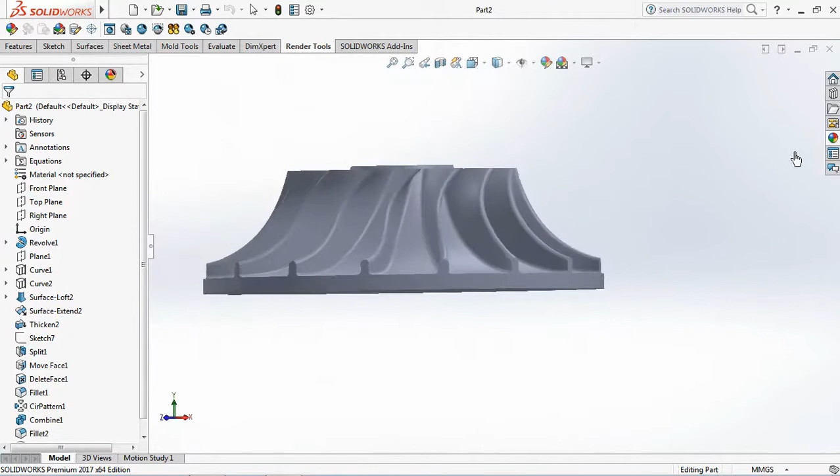Click front plane, then choose revolve boss. Create a profile sketch consisting of center line, line, an arc.

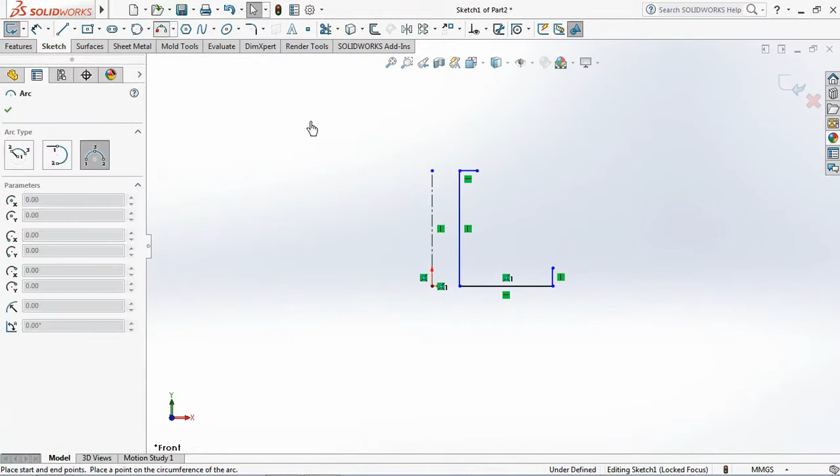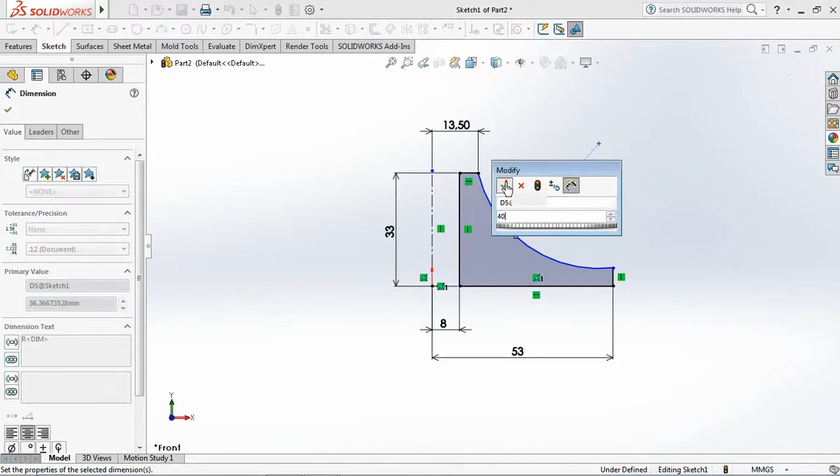Set each dimensions at 8 millimeters, 53 millimeters, 13.5 millimeters, 33 millimeters, radius 40 millimeters, 4 millimeters.

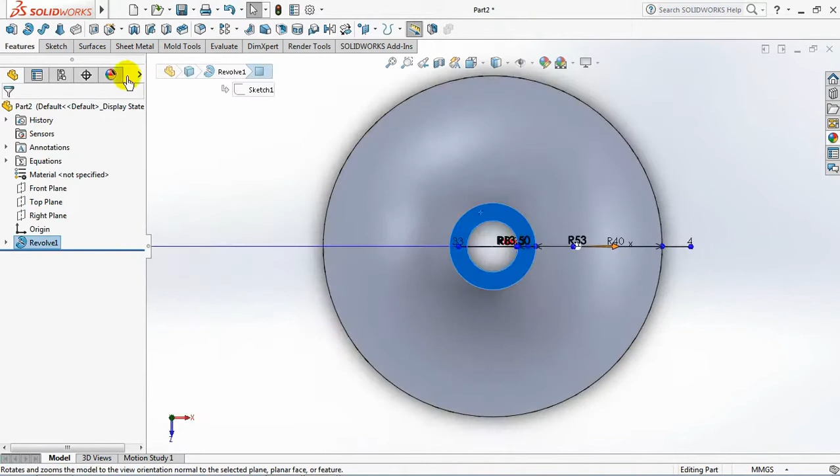Then set chamfer at 3 millimeters equal distance. Exit sketch, then click OK. Click top surface of impeller, then choose sketch on the sketch toolbar. Draw a horizontal line.

Then make a downward sloping center line. Set horizontal line at 30.5 millimeters. 20-degree angle. Exit sketch.

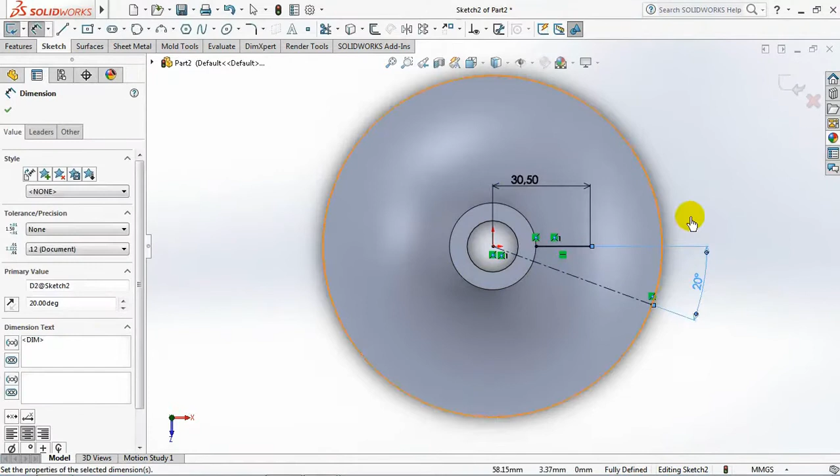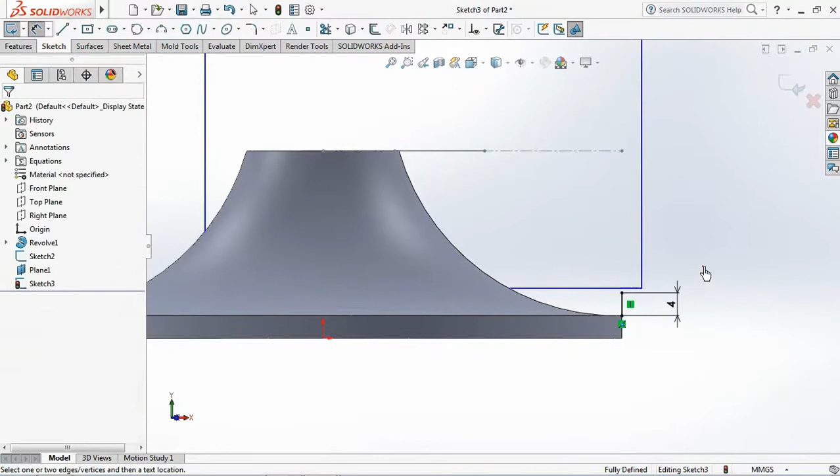Create a new plane. Click the top surface as the first reference, then click the center line as the second reference. OK. Then choose sketch on the new plane. Draw a vertical line. Set the dimensions at 4 millimeters. Exit sketch.

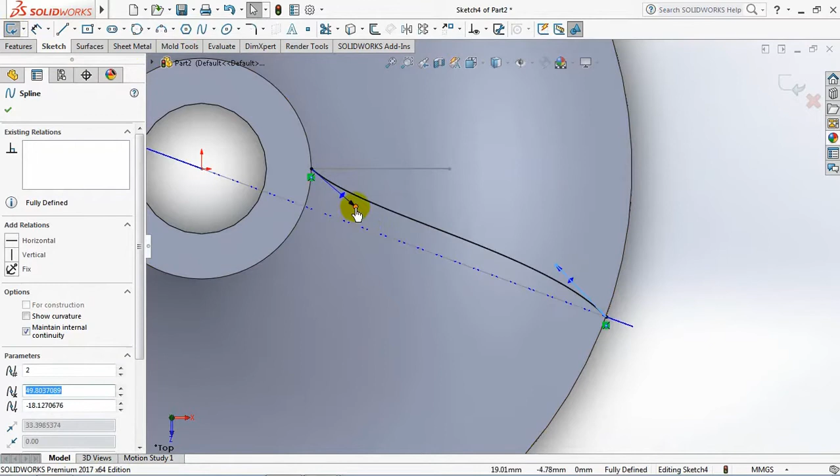Click the top plane, then choose sketch on the sketch toolbar. Create a spline sketch. Click spline, then drag the spline arrow. Arrange as shown on the screen. Exit sketch.

Click the sketch, then choose project curve on the surface toolbar. Choose sketch on face, then click projection face. OK.

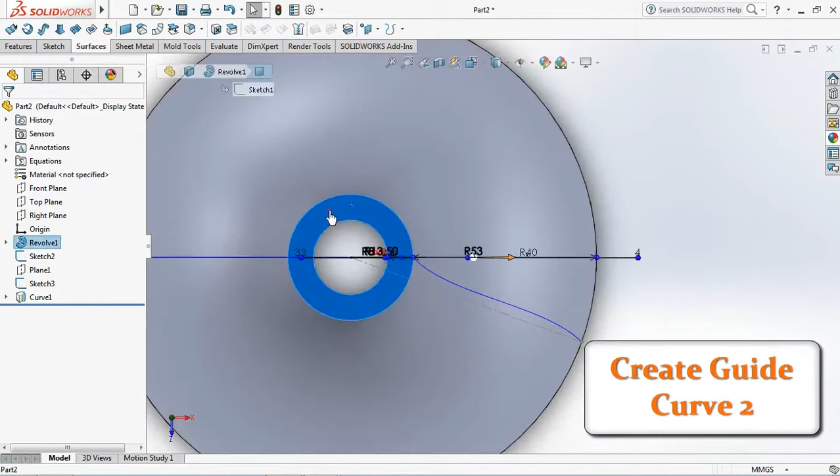Click top surface of the impeller, then choose sketch on the sketch toolbar. Create a spline sketch. Click curve 1, then select convert entities. Choose trim entities, then click trim to closest.

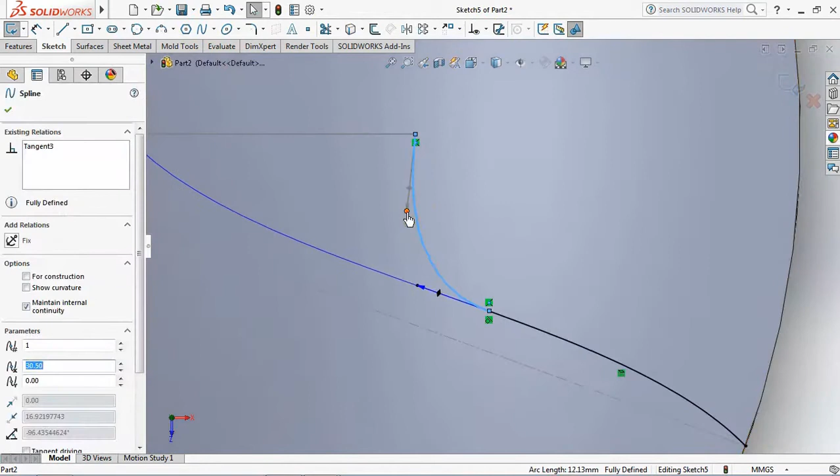Use add relations to set the spline to be tangent to the convert entity line. Click at the spline, then set the arrow to the right slightly. Exit sketch.

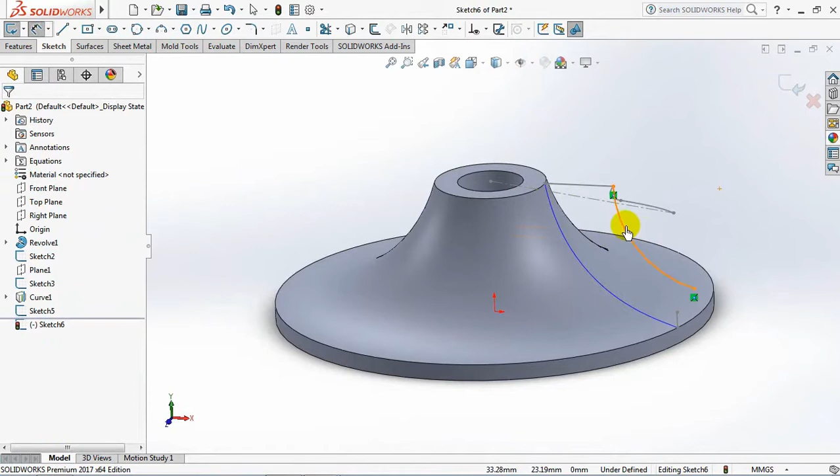Click front plane, then choose sketch. Sketch an arc. Set the arc radius at 26 millimeters. Exit sketch. On the surface toolbar, choose the project curve. Choose sketch on sketch. Click sketch 6 and sketch 5. OK.

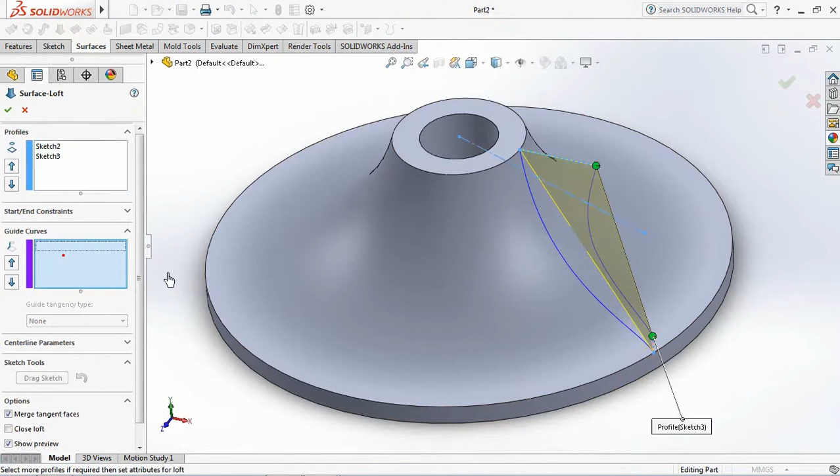On the surface toolbar, choose lofted surface. On profiles, choose sketch 2 and sketch 3. Then on the guide curves, choose curve 1 and curve 2. OK.

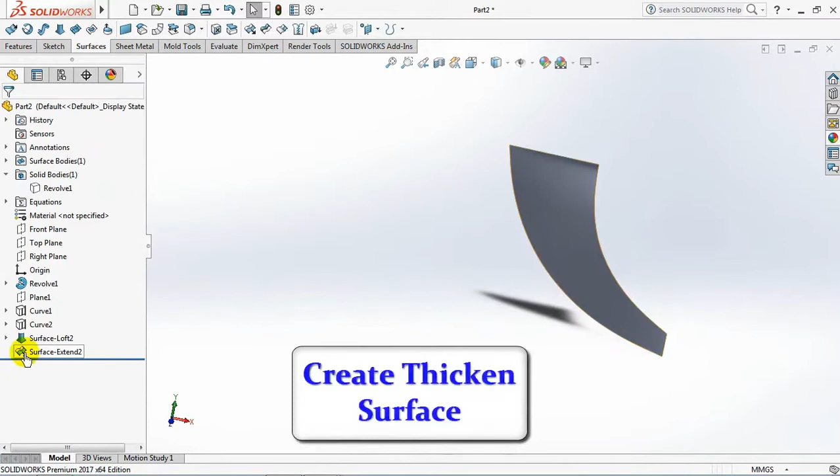Choose extend surface. Set the distance at 1 millimeter, then choose edge to extend. OK. Click extend surface earlier, then choose thicken on the surface toolbar. Choose the thicken both sides, and set the thickness at 1 millimeter. OK.

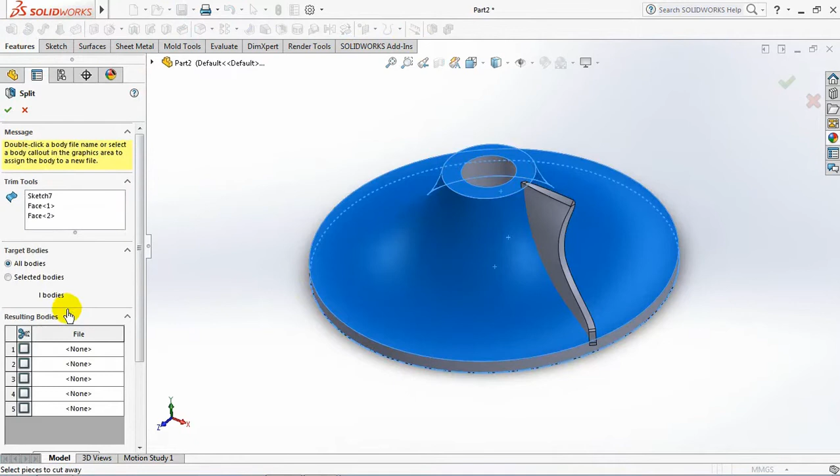Create a circular profile at the bottom of the impeller as a cutting profile. Then on the features toolbar, choose split. Click the 3 trim tools, then click cut bodies. Choose consume cut bodies. OK.

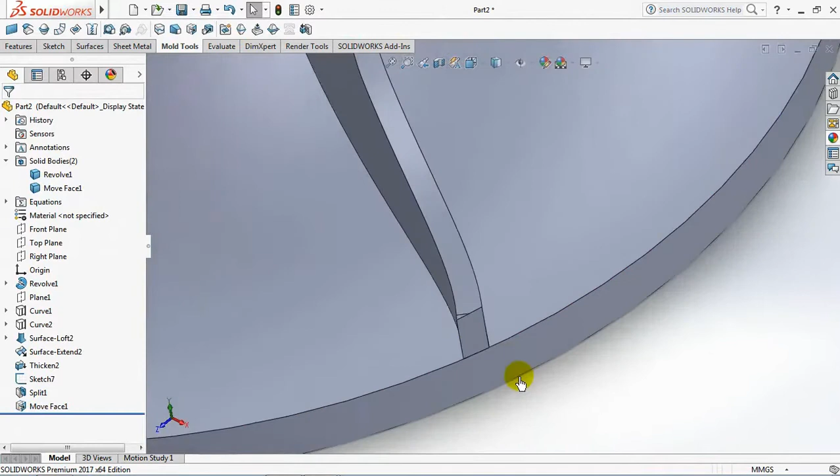On the mold tools toolbar, choose move face. Set distance at 1 millimeter. Click face to move. Check flip direction. OK. Choose delete face, then click faces to delete. Option at delete and patch. OK.

Choose fillet, then set fillet type to full round fillet. Click item to fillet. OK.

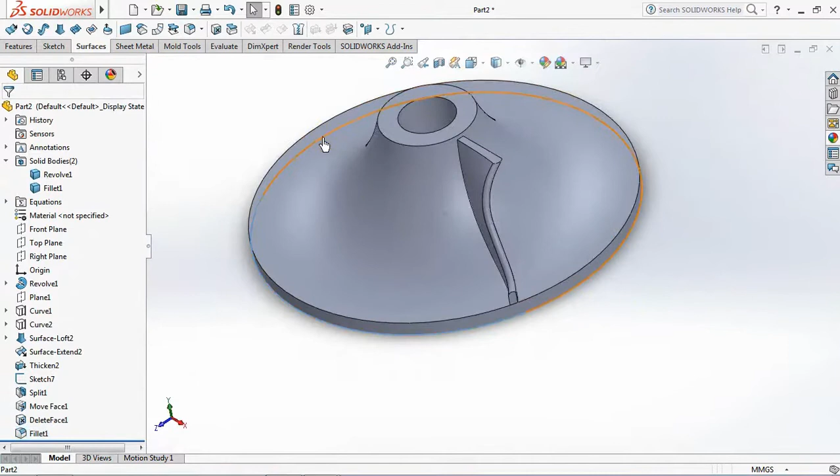On the features toolbar, choose circular pattern, click fillet 1 bodies. Then click inner face of impeller as pattern axis. Number of instances is 16. OK.

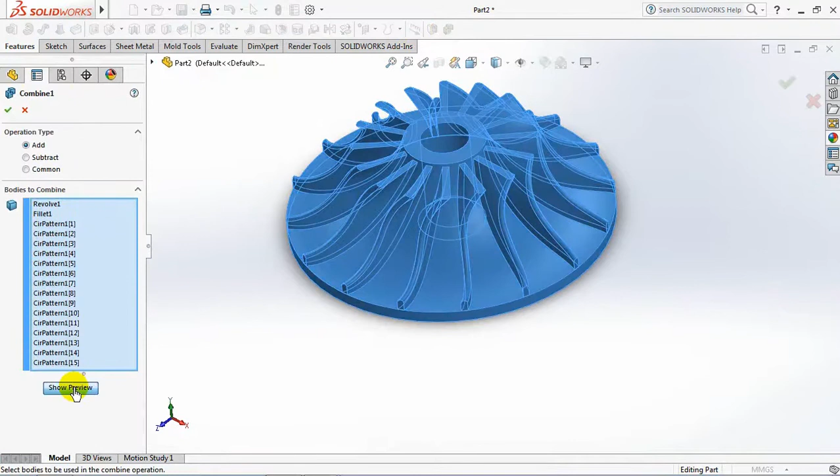Choose all solid bodies. Click revolved 1 bodies, then hold down keyboard shift, click circular pattern 1[15]. Then choose combine on the features toolbar. Show preview. OK.

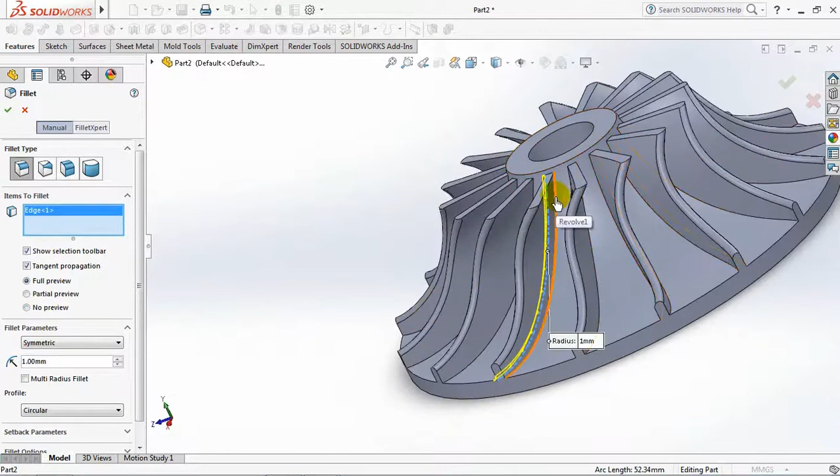Choose fillet on the features toolbar. Set radius at 1 mm. Choose items to fillet. OK. Repeat the fillet command for all existing fins.